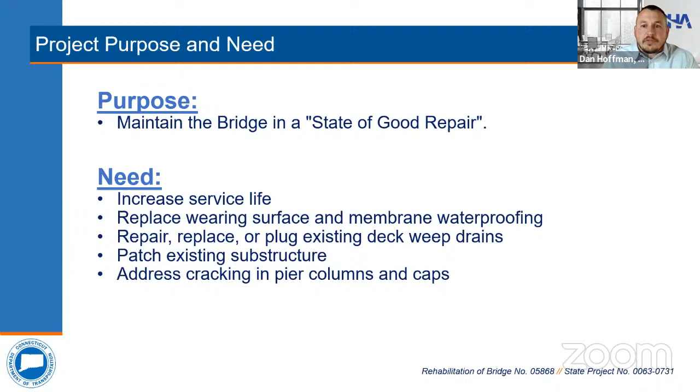The purpose of this project is to maintain the bridge in a state of good repair. Project needs include increasing the service life, replacing the wearing surface and membrane waterproofing, repairing, replacing, or plugging existing deck weep drains, patching existing substructure, and addressing the cracking in the pier caps and columns.

First, we'll go over the project location. Bridge number 05868, the I-84 Flyover Bridge, carries I-84 eastbound turning roadway 839 to I-91 northbound. This is exit 51 on I-84 eastbound. The bridge carries ramp traffic over local roads Morgan Street and Market Street, as well as I-84, I-91, several ramps, and the CSO Railroad. The bridge was built in 1990.

In 2012, rehabilitation was performed, which consisted of wrapping Pier 2 in a fiber reinforced polymer, also known as FRP wrap, coating Pier 5 in a protective sealer, and replacing the modular expansion joints on the bridge.

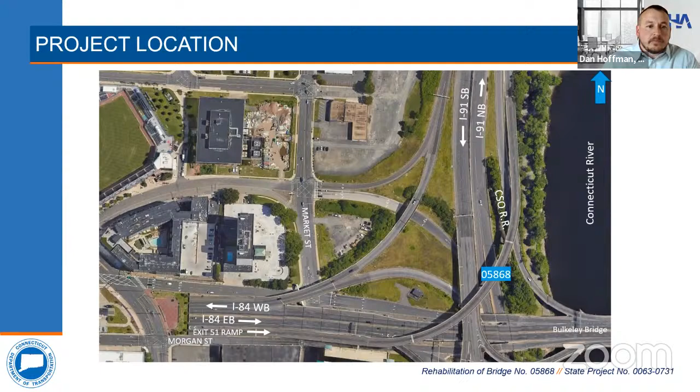The bridge has a total length of 1,726 feet, consisting of 9 spans. The structure is comprised of a concrete deck supported by 2 steel tub girders. The 9 spans are split into 3 three-span continuous segments: spans 1 through 3, 4 through 6, and 7 through 9. The superstructure is supported by concrete abutments and piers.

This is a plan and elevation of the second half of the bridge.

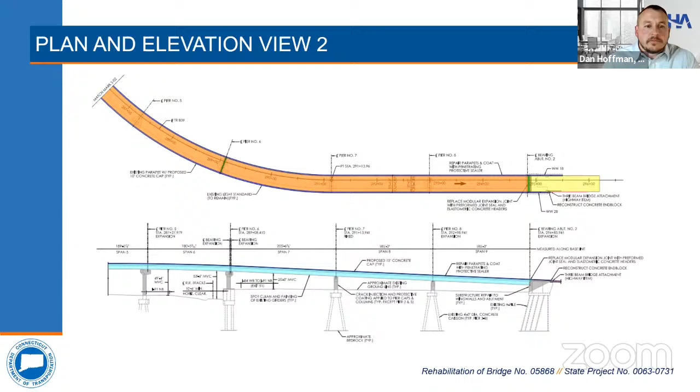This view shows a cross-section of the bridge. The ramp is a single lane of traffic from exit 51 on I-84 eastbound, carrying traffic to I-91 northbound. The lane varies in width on the bridge from 12 feet 7 inches at abutment 1, then widens to 14 feet at Pier 1 and remains 14 feet for the rest of the bridge. The roadway maintains a 6-foot left shoulder and a 10-foot right shoulder throughout.

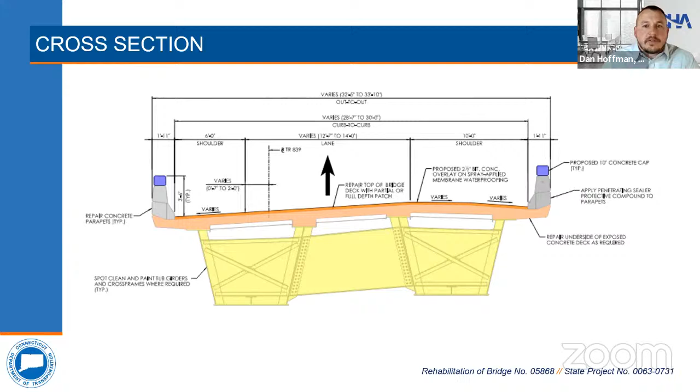Before getting into the existing conditions, I thought it would be useful to note how condition ratings are determined and the purpose of them. Per the Connecticut DOT Bridge Inspection Manual, a condition rating is a judgment of a bridge component's condition in comparison to its original as-built condition, used to provide an overall characterization of the general condition of the component being rated. Condition ratings are assigned a numerical value, each indicating a different condition, as shown on the screen.

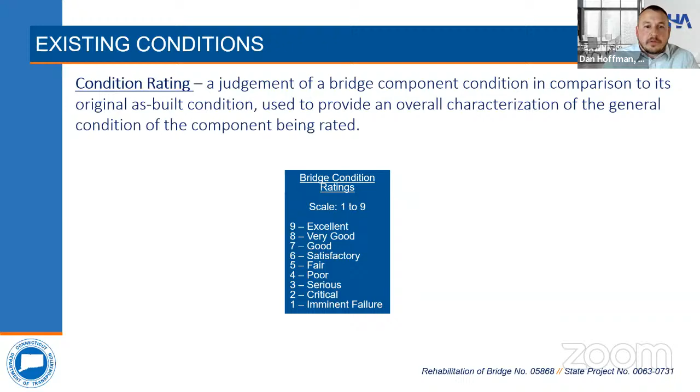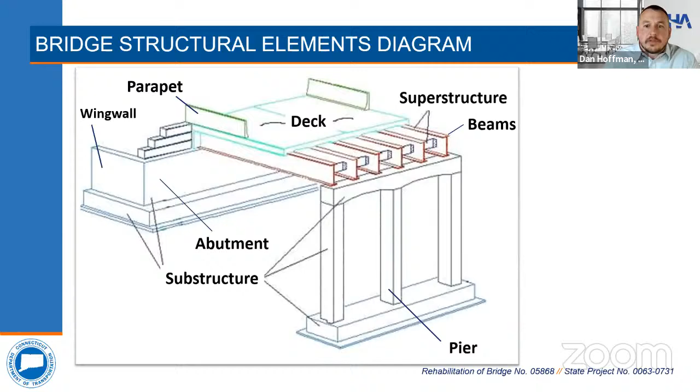To help clarify the elements of the bridge we'll be discussing, we've included this graphic. The deck is the surface that you drive on. The parapets are the safety barriers on the edge of the deck. The deck is supported by beams, and this makes up the superstructure of the bridge. The substructure is what supports the superstructure from below. This consists of abutments and wing walls at the ends of the bridge, and piers located as needed to provide intermediate supports.

Now I will discuss the existing conditions of the I-84 flyover bridge. For the deck, overall, the deck is noted to be in good condition. The bridge has stay-in-place forms between the box girder flanges and has no notable deficiencies. The underside of the deck overhang shows random areas of light scaling, linear cracks, and minor spalls. The condition of the deck is mostly unknown due to the bituminous concrete wearing surface on top, as well as the stay-in-place forms on the underside.

The existing deck drains are in fair condition, with random deck drains having broken or short weep pipes. Some locations have been plugged previously, but are still observed to be leaking on the structure.

Existing deck joints are in satisfactory condition. They're modular deck joints with concrete headers located at abutments 1 and 2 and piers 3 and 6. The concrete headers exhibit minor transverse cracks, vertical misalignment up to 1/4 inch at abutment 2. There's random sand and debris within the joint glands, and the sliding plate at abutment 2 has a 3-inch high gap at the base. At abutment 2, there's also approximately 3-inch undermining of the joint at the north end due to a spall at the back wall.

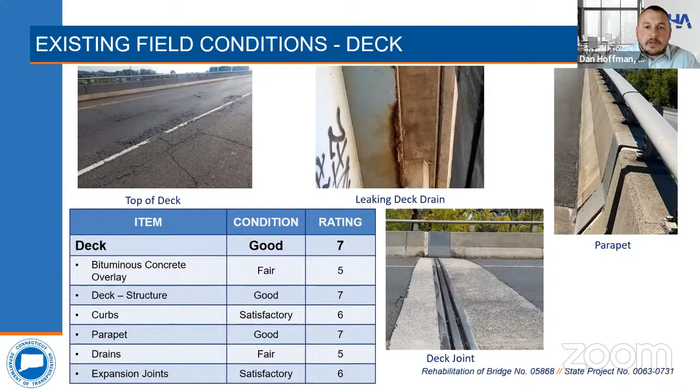The bridge has concrete parapets with sloped granite curbs and an aluminum bridge rail. Concrete parapets are in good condition, and the curbs and railings are in satisfactory condition.

Overall, the approaches are in satisfactory condition. There are no approach slabs per the existing plans. The approach pavement is noted to be in good condition, with minor defects such as light ravel and 1/2-inch wide separations between bituminous and concrete joint headers.

Approach parapets are located at the southwest approaches and the northwest corner of the bridge. These parapets have random vertical cracks with efflorescence, random areas of scaling, and minor impact scrapes. There is an impact attenuation system at the gore of I-84 and the bridge. The approach guardrail at the northeast corner has some minor impact damage and appears to meet NCHRP 350 standards.

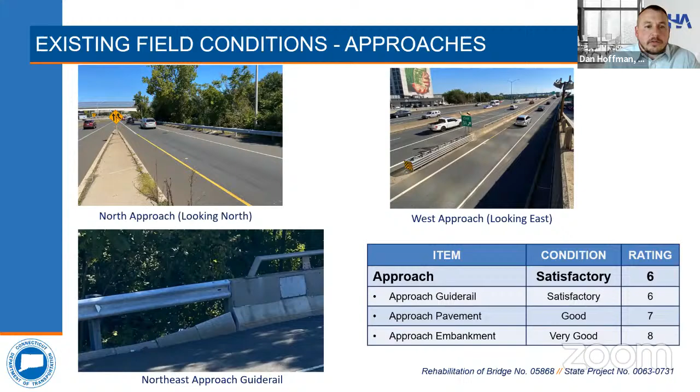Overall, the superstructure is in good condition. The bearings are in satisfactory condition, consisting of both fixed and expansion pot bearings original to the structure. Deteriorations in the bearings include light to moderate rust with isolated locations of heavy rusting, loose PTFE strips, and loss of elastomer at isolated locations.

The girders are in good condition, exhibiting less than 5% paint deterioration. As shown on the slide, the field splice bolts are rusting with failed paint. The girders have random locations of light to moderate rust, with isolated areas of heavy to laminated rust adjacent to failed deck drains. Section loss is negligible. The interior of the girders have locations of rust at lateral bracing connections, some staining at the bottom flanges, and loose bird screens at the end diaphragms. There's built up pigeon debris at locations within the girders as well.

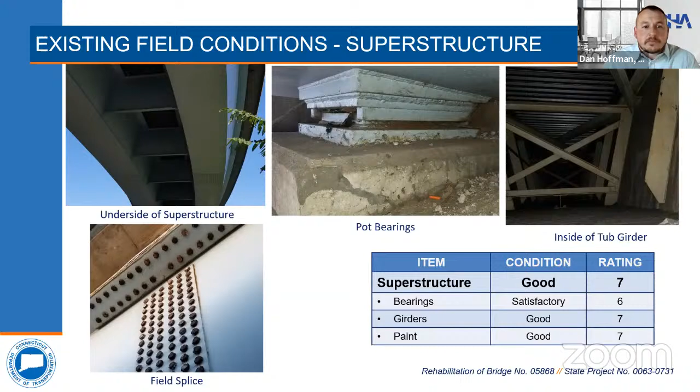Overall, the substructure is in satisfactory condition. The substructure consists of reinforced concrete abutments and piers with post-tension pier caps. Concrete abutments exhibit isolated hairline cracks, hollow areas, and leakage of backfill material through the drainage weep pipe at abutment 1.

The back walls have a few moderate spalls. The wing walls are in good condition and exhibit minor defects such as hairline cracks. The pier columns and caps are in satisfactory condition.

Columns have up to full width and full height hairline map cracking. Post-tension pier caps have random hairline map cracking and diagonal cracks to full height and width of the pier caps and underside, the cap faces and undersides. There are isolated locations of horizontal or diagonal cracks up to 1/32 inch wide.

As noted earlier, Pier 2 was previously wrapped with FRP, and Pier 5 was coated with protective sealer to address the cracking. The grout pads are noted as having random cracks up to full perimeter, hollow areas, and spalls up to 3 inches deep. However, no undermining of the bearings is noted.

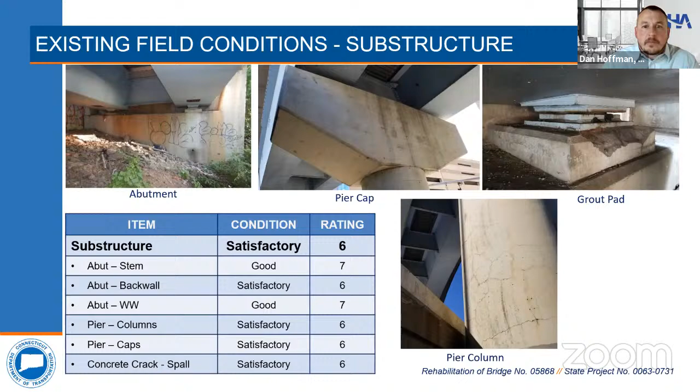As stated before, the purpose of this project is to maintain a state of good repair. Project needs include extending the service life, replacing the wearing surface and membrane waterproofing, repairing deck drains, and repairing the substructure. The major scope of work items includes...

Replacing the wearing surface and membrane waterproofing, repairing the concrete decks and parapets, removing the aluminum bridge railing and constructing a 10-inch concrete cap on top of the parapets, repairing, replacing, or plugging the deck weep pipes, repairing concrete headers, removing debris accumulation from expansion joints, and replacing the expansion joint at abutment 2.

Installing new chevron curve signs on parapet mounted sign supports along the southeast parapet. Some spot cleaning and painting of the structural steel where required. Replacing the mesh at the ends of the tub girders and removing the pigeon waste from inside the tub girders.

Cleaning and painting the bearings, repairing the pedestals. Crack injection and applying a crack bridging protective coating to the pier caps and columns. Substructure repairs to the abutments and wing walls. Installing new MASH compliant guide rail bridge attachments and MASH compliant impact attenuator at the exit 51 gore.

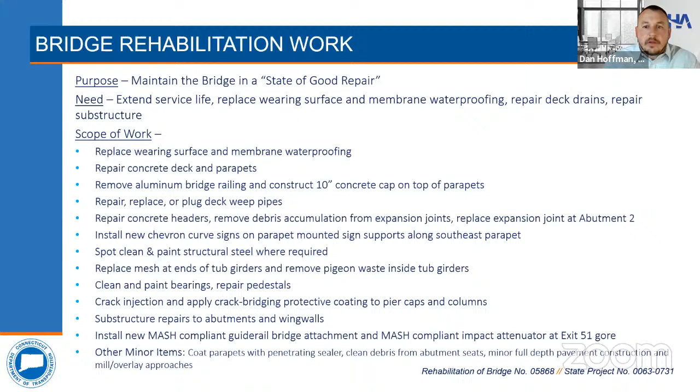Next, we're going to highlight some of the proposed work. First is the parapet cap. The existing parapet has an aluminum bridge railing on top. The railing has minor scrapes from impact, up to 8-inch long cracks, and some backed out or missing anchor bolts.

Under the proposed condition, the railing will be removed and replaced with a concrete cap. This will provide a solid concrete parapet 42 inches from the pavement and improves the safety.

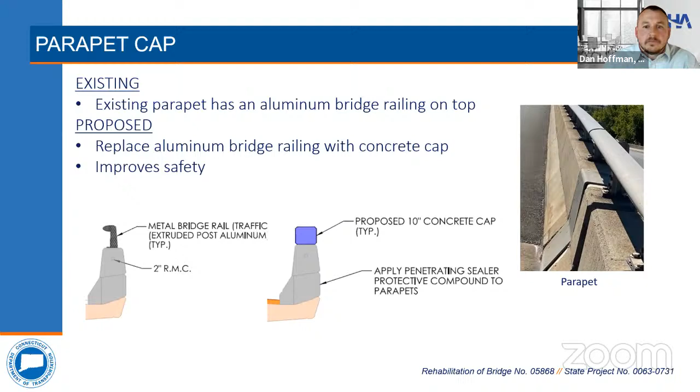Overall, the deck joints are in satisfactory condition with minor deteriorations. The abutment 2 joint location has the majority of the deficiencies, including some spalling on the back wall that is undermining the bridge joint support, a noticeable grade drop coming off the bridge at this location, and a gap at the sliding steel plate in the parapet that could cause further deterioration.

The proposed condition is to replace this modular joint at this location with a preformed joint seal and elastomeric concrete headers. This will allow the back wall spalls to be properly repaired. It'll eliminate the concrete headers and allow a smoother transition off the bridge. The sliding steel plate will also be addressed.

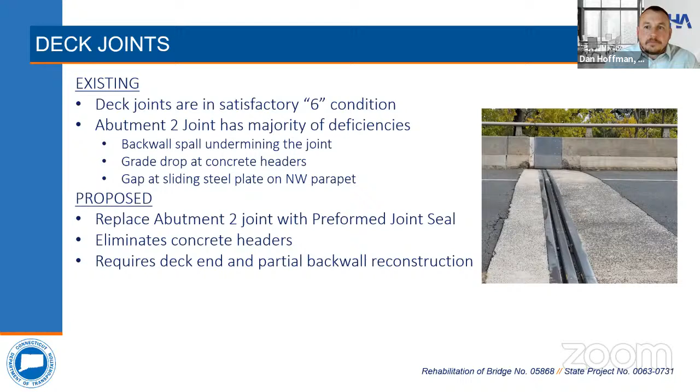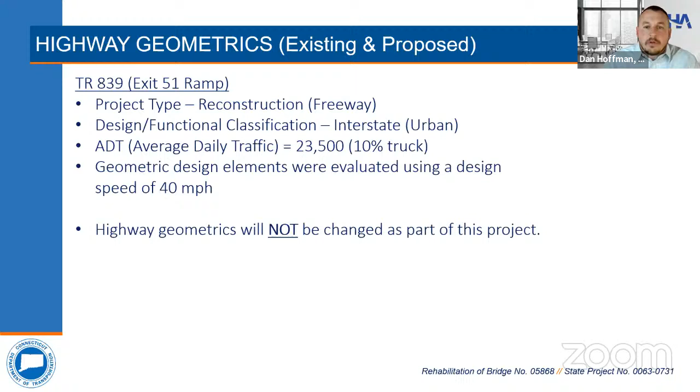Quickly touching on the highway geometrics of the project site. As you can see, the bridge is fairly heavily traveled with an ADT of around 23,500 for the single lane. Horizontally, the bridge is located on a horizontal curve with tangents present at both approaches. Vertically, the bridge is on a crest vertical curve, carrying the traffic up and over the roadways below. The project will not change any of the highway geometrics.

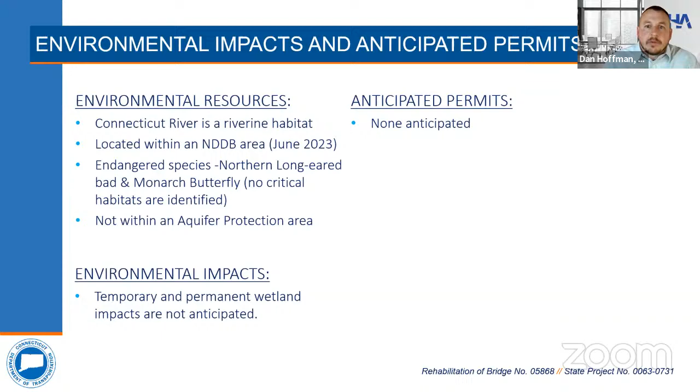Stage construction on the bridge will be used for milling and overlaying, repairing the concrete deck, installing the membrane waterproofing, capping the concrete parapets, and replacing the expansion joint at abutment 2. Not all of the deck area can be worked on behind the barrier, so as anticipated, a portion of the deck repairs, joint work, and paving will be accomplished using temporary off-peak lane closures of the bridge with a detour.

Adjacent roadways will have temporary off-peak lane and shoulder closures as well to perform substructure repairs. Just a note, off-peak hours refers to nighttime and/or weekend hours when traffic volumes are lower. There are no anticipated impacts to utilities or rights of way.

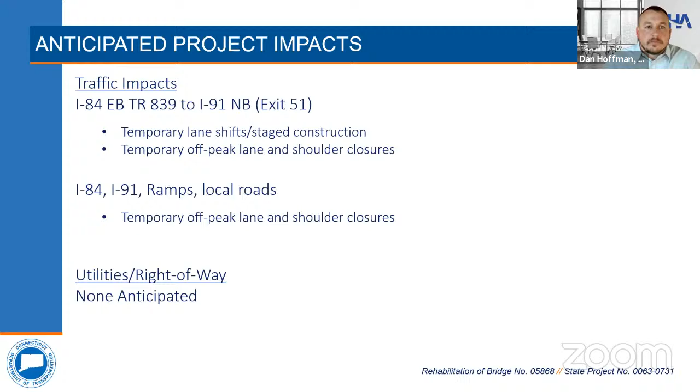I'd like to note that CHA is also the designers on the Bulkeley Bridge Rehabilitation project, and will further coordinate and evaluate the traffic impacts during final design for both projects.

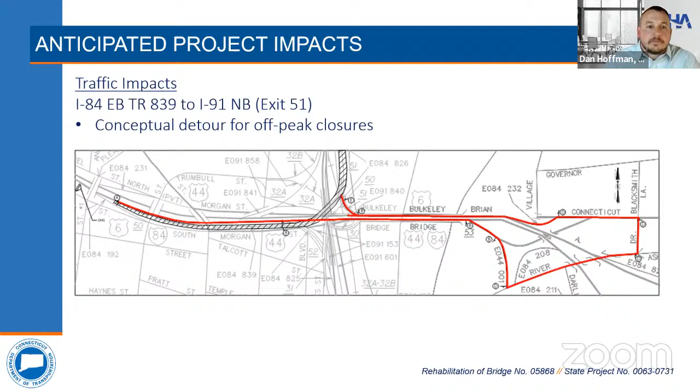We are currently evaluating the location below the I-84 bridges adjacent to Market Street and Morgan Street as a laydown area. This has been used previously as an equipment material laydown area, and other areas may be identified and evaluated during the final design.

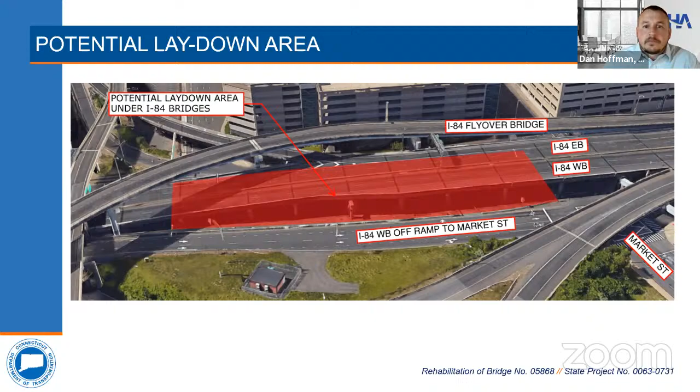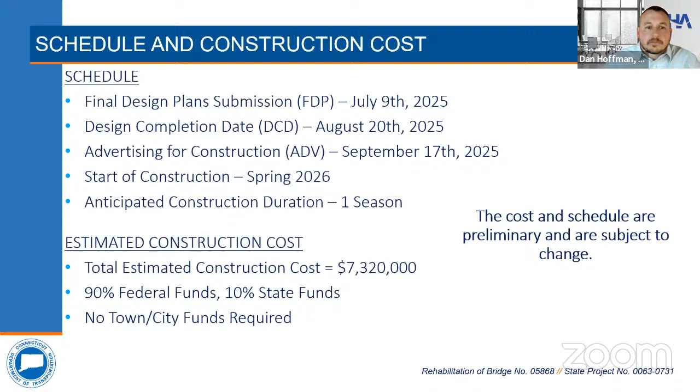This concludes my presentation, and I'll hand it back over to James. Thank you for that, Dan. So as Dan said, this concludes the technical portion of the presentation, and we will now open the floor up for any questions or comments that the public may have.